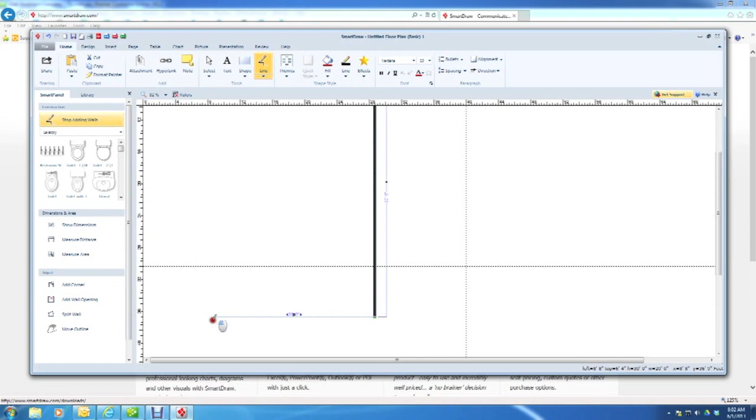And then what we can do is, and I'm just going to make this up as I go, but this will just be a bedroom down here. We're going to put a line all the way across here and split this up.

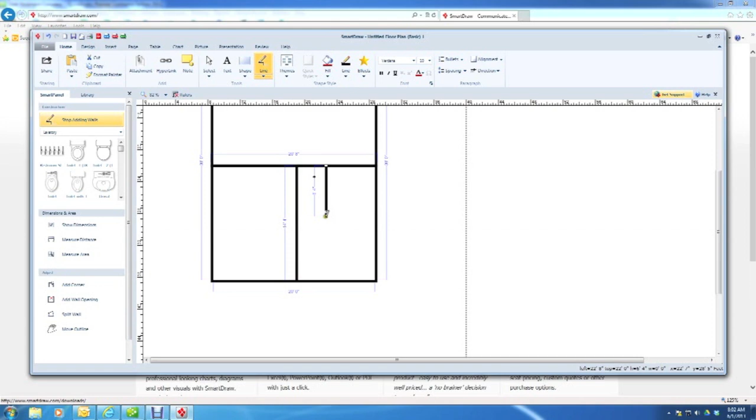So what I have here is our utility room here, a little hallway going into the bathroom, a bedroom here, and we're going to put a closet in this bedroom. And then I have the stairs coming down here.

Okay, so there's a rough layout of our basement. I'm going to click on Stop Adding Walls. Then I'm going to go to the library selector, and let me show you a couple tricks here.

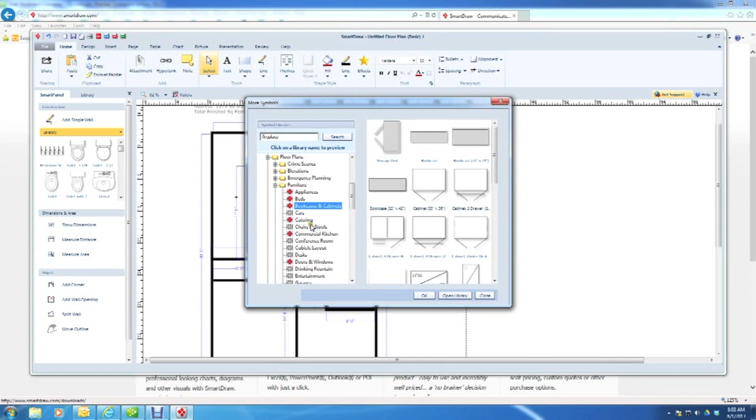Go down to More, and it'll open up the More symbols. So what you can do is click on this, and it's got pretty much every symbol you could possibly need for laying out a basement. I've got my favorites right here, which are stairs, my outlets, the fire alarm, and what I do is click on the open library, and that sends it over here for me.

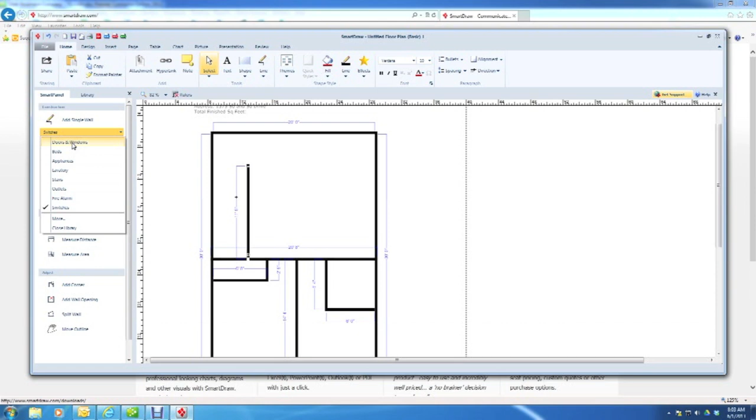So now I have all my favorites on this side. Let's just get the stairs over with and get those placed where they need to go. I put them in there, and we twist them and just slide it into place. Then make these a little bit bigger and bring this tighter.

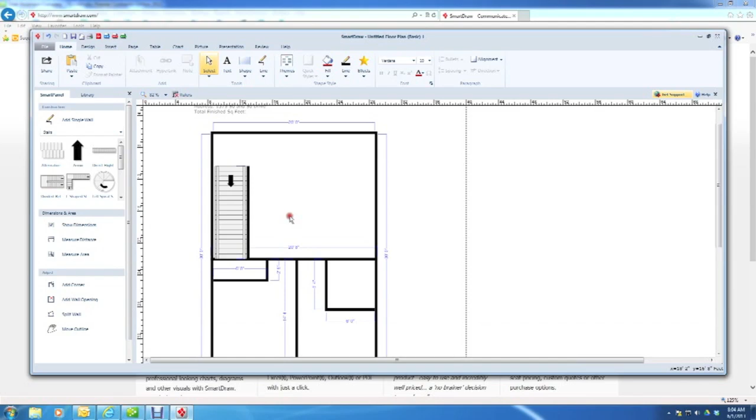Just use your arrows to get it where it needs to be. Take the arrow for the stairs, and you want to point the arrow going up the stairs, and there you have it. Next we want to do some doors.

Get the doors where they're going. They don't need to be the exact size, just need to show the plan inspector where they're going and make sure that they can sign off on that. So there's two doors right there.

We're also going to put a bifold going into the utility room. After you attach it, you can stretch it out a little bit more and get it to the right size that you need. Same thing with the bedroom.

We can do a bifold right here. Oops, let's do this one. Sometimes they flip it around. There we go. And that's pretty much it for the doors.

Let's take some windows and put them where they go. There's a window there, and then we also have one more window in the bedroom.

Now, in the windows, what you want to do is the city's going to want to know what size of the windows, and these windows are 4050 windows, they're 4 foot by 5 foot. And what we do is we put that tag right there, and I'm going to hit Control C and then Control V to copy and paste that again, and just want to put it right by the window and let them know the size of that window.

Next up, let's work on the bathroom. So let's get our toilet and flip that around. We're also going to get a vanity, put that where it's going to go, and flip that around as well.

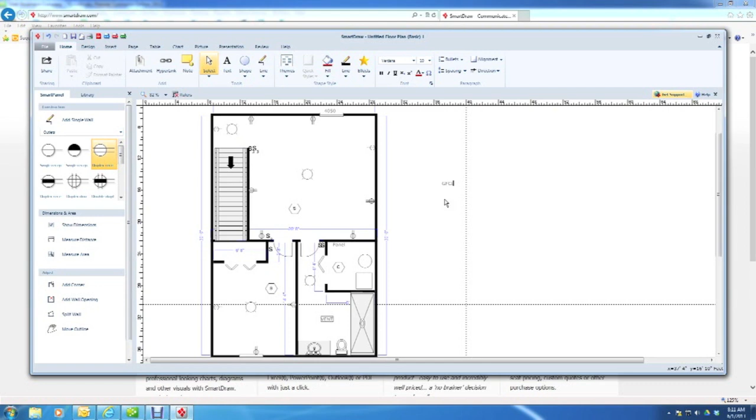One other item I'm looking at that I need to take care of is make a text box for the bathroom GFCI. All you need to do is type GFCI, and that's going to go right next to the bathroom vanity. So we'll take this and drag it over.

And then do a review. The final thing I like to do is put descriptions on the rooms that we're finishing, and I like to tell the city if it's finished or not finished. So this is a finished bedroom, this is a finished family room, and then a finished bathroom. Just stick those and drag them where they need to go.

And then finally, we're just going to measure the area of the basement. So you click over here on measure area, and I know that my utility room is about 40 square feet, and as you can see right there it says 600 square feet. If you click on this again and hit delete, it'll remove that. So now I know that I've got 600 square feet there.

Mine is about 30 to 40 feet, so I'm just going to put 560 in there for the utility room. The city needs to know that so they can determine the price to charge you for the permit, and the city will also measure it as well.

And so next up, I'm going to print it. What I want to do is click over here on print to one page, and it'll get it right there for you, all on one page. Make 3 copies, and off you go.